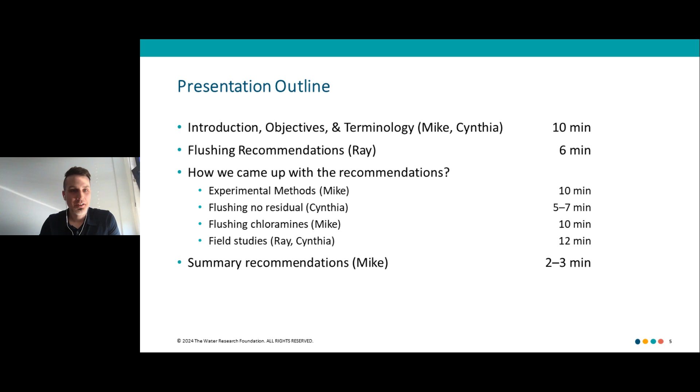I'll start with some introduction to the project and some background. Legionnaires' disease, of course, is something we're all interested in preventing. It's severe pneumonia, but Legionella can also cause other types of infection, like Pontiac fever, which is a milder influenza-like infection. There are also potentially other extrapulmonary infections that can be caused by Legionella.

It's important to also note that when we talk about Legionella, risk isn't equally apportioned. Legionella pneumophila is responsible for 90% or more of cases. It depends a little bit regionally, but it's the most commonly associated with illness, especially serogroup 1, more so than the other serogroups. But there are, and this is always updating, at least 64 or 65 other species, and about half of these have been clinically observed.

But these clinical cases account for a minority, typically less than 10%. That's probably underreported, but I think it's fair to say that Legionella pneumophila is the greatest cause of infection. But there is ongoing debate about the focus of preventative measures as well as monitoring, focusing specifically on the species Legionella pneumophila versus other Legionella.

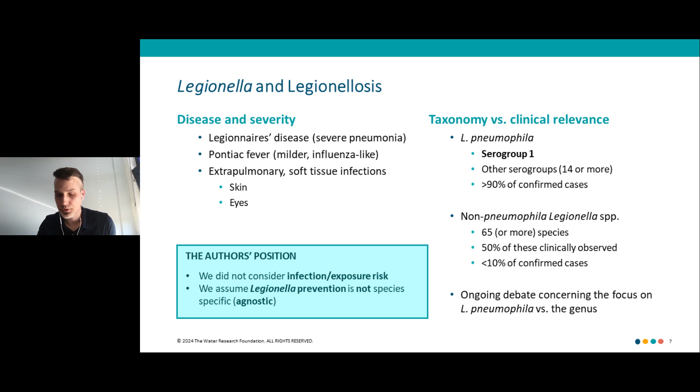Yes, so a little bit about, so water is not sterile. Drinking water is not sterile, and that includes both groundwater and surface water. And whenever you have water in contact with surfaces, you have biofilm develop. Bacteria tend to prefer being attached to things. And so Legionella are quite adept at integrating into both relatively young as well as mature biofilms. And once present, they become usually a small but persistent and ubiquitous fraction of the community.

And as biofilms grow, several things start to happen in terms of the ecology of the system. You can have shedding of the biofilm, which can spread new biofilm or colonization to downstream surfaces. But you can also start to attract protozoa. And so, for example, if you think of protozoa as cattle and biofilms as green pastures, protozoa come to feed. And this is usually deadly for bacteria in the biofilm, but Legionella have adapted to actually infect the protozoa and the host.

And so if Legionella infect the host, they can use the host for replication, and eventually they may reproduce and be released outward, where they can, again, infect other protozoa. They can infect or colonize biofilm. But if there's the risk of exposure, and you have a person inhaling water that's contaminated with Legionella, there is a risk of infection. The main cause of infection in terms of Legionnaires' disease is that Legionella infects the macrophage cell.

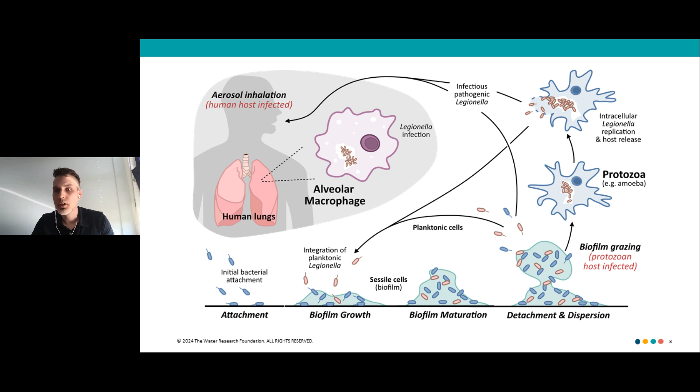So macrophage cells or white blood cells in the lungs are very similar, unfortunately, to protozoa and amoebas. And so Legionella pneumophila in particular is very adept at infecting this. But it's important to note that all Legionella more or less have some iteration of this. They're all parasitic in nature. And so if we talk about the factors benefiting Legionella survival and growth, general bacterial growth is a risk factor, and especially protozoa. But more broadly, the presence of carbon and nutrients that are available to support bacterial growth is also a risk factor. But we can also talk about temperature.

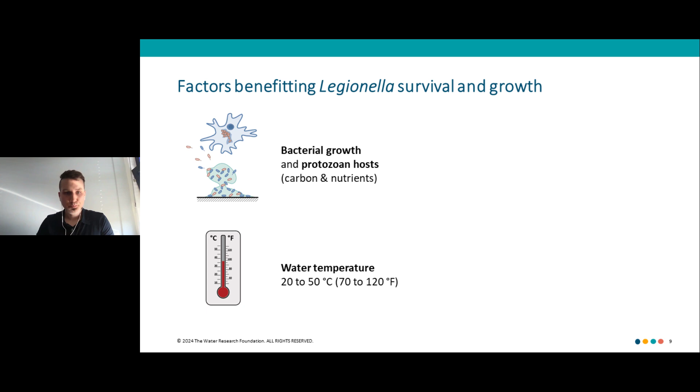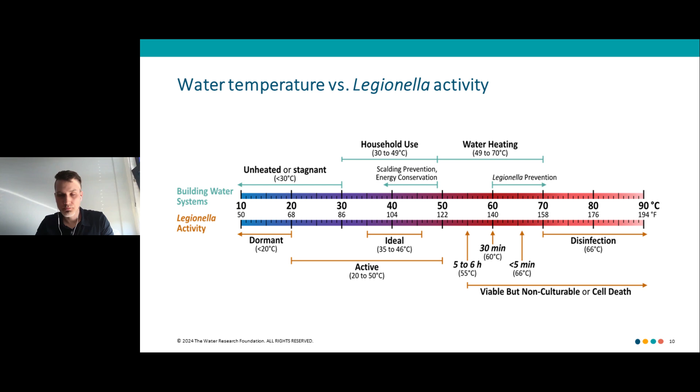But it's also worth noting that cold water, despite the name, we're calling it cold water, it's not necessarily cold. There can be thermal contamination from the hot water lines, and cold water can also be relatively warm seasonally, for example, depending on the source. So going back to the factors benefiting Legionella survival and growth, another one that we can think about is also whether there's a disinfectant residual present, and especially if there isn't, or if it's lost, that is also a risk factor. Legionella are generally vulnerable to various disinfectants, chlorine, chloramine, and others. So the lack of them benefits them.

These three other factors, growth rates, temperature cooling or heating up, but also loss of disinfectant residual, are all more or less time-based. So we might generalize that time is important, and especially residence time or water age is important.

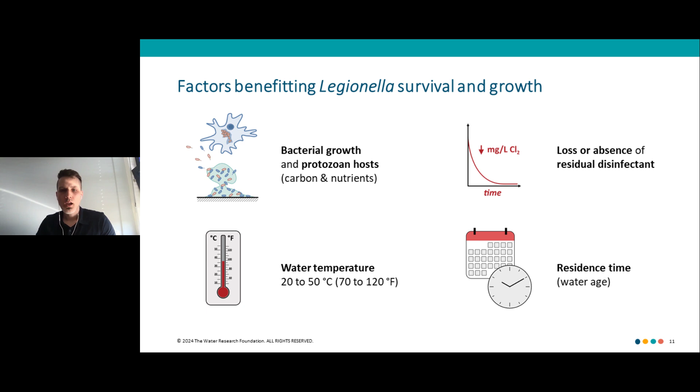And so if we think about the role of flushing, it can be simply to just manage or reset the water age, but this has other consequences, beneficial consequences. For example, we can regulate the water temperature, keep the cold water cold, keep the hot water hot. We can also expel accumulated biomass and replenish residual disinfectant.

So in this project, Water Research Foundation Project 5033, we had several objectives: assessing flushing for its potential as a corrective action for preventing and reducing Legionella levels in service lines of premise water systems, using a combination of laboratory experiments as well as real-world case studies to generate novel hypothesis-driven data. We then wanted to use those data to provide evidence-based recommendations to a broad audience of potential stakeholders regarding the efficacy of flushing for Legionella prevention.

So I'll hand it over to Ray. Hi, everybody. So what I'd like to do next is provide you with our recommendations at the outset. Then we will provide you with all the basis for these recommendations, including our experimental design, our field testing, and our results. And then Mike will come back and remind you of our recommendations at the end. So we'll tell you what we're going to tell you, we'll tell you, and then we'll tell you what we told you.

All right, so Mike pointed out a lot of these things already, so I'll just be brief. In terms of defining the problem and corrective action, we wouldn't be here if we didn't all believe or know that Legionella, and especially L. pneumophila, can cause severe illness. Another important point to mention is that these are not organisms that are associated with fecal contamination, unlike conventional pathogens that we normally worry about in water. These are naturally present in water and soil. And so because they're present in probably all or nearly all water supplies, including even groundwater, they can result in exposure risk in buildings if they multiply.

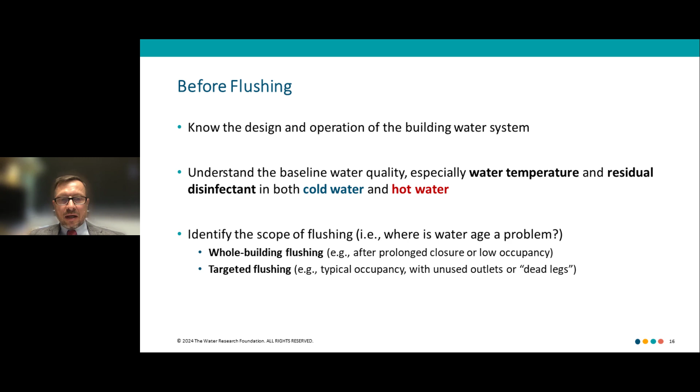And then it's important to identify the scope of flushing. So where is water age or extended water age a problem? Is this a whole building issue, say perhaps during the COVID pandemic when some buildings like offices and campus buildings here at the universities were shut down entirely? Or is it a targeted flushing? Maybe it's a specific unused outlet or dead leg in an otherwise occupied and heavily used building.

And our general flushing recommendations are as follows. First is to prime, what we call prime the cold and hot water systems with fresh municipal water coming from the mains, which typically would be the water of highest quality in the system. And so you would start near the inlet and flush out the service lines supplying the building, and then flush between the inlet and the hot water system if possible, and then move progressively further into the building. And as I already mentioned, it's important to note the baseline temperature and or disinfectant concentration entering the building so that you know when you've got that quote unquote fresh water exiting your tap.

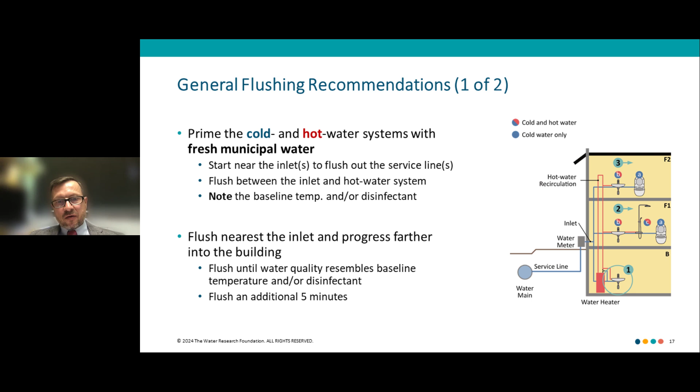And then, as I mentioned, flushing near the inlet and progress further into the building. It's important to flush until the water quality resembles the baseline temperature. By baseline, we mean water entering the building, say from the mains, and the disinfectant levels in that supply, or the water exiting the hot water heater, if you're flushing hot water lines. And then we recommend flushing an additional 5 minutes after you get that water quality to represent the inlet water quality.

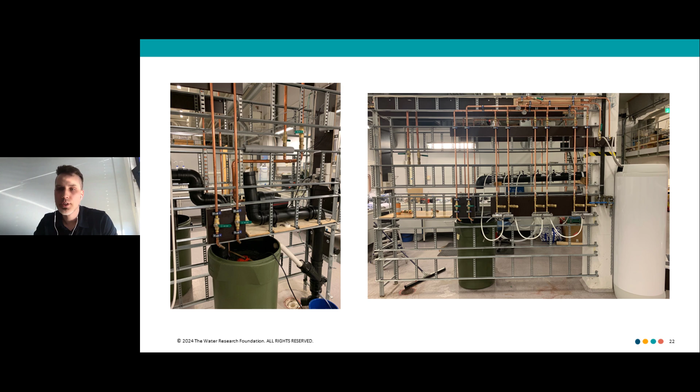On the right, it's a little bit difficult to see, but you have 3 showers, a water tank, and behind it you can kind of see the other rig, which is in parallel. So they're literally mirror images of one another. On the left-hand side, there's a garbage can that we basically used as our mix tank. So we could feed chloramine into that, mix it, and then deliver it via pump into the system.

So we operated this pilot for approximately a year, just a little over a year. And during that period, we operated 4 experimental phases. And so what these represent are different combinations of the variables. So we had the copper pipe, the PEX pipe. We had the first 2 phases without disinfectant, phases 3 and 4 with chloramine, and then switching from 60 to 49 and back to 60 again, with some time in between these phases to allow the system to adapt to the new conditions. Within these, we also had flushing events. So each phase had 3 flushing events. And I'll talk a little bit more about what a flushing event is in a few slides.

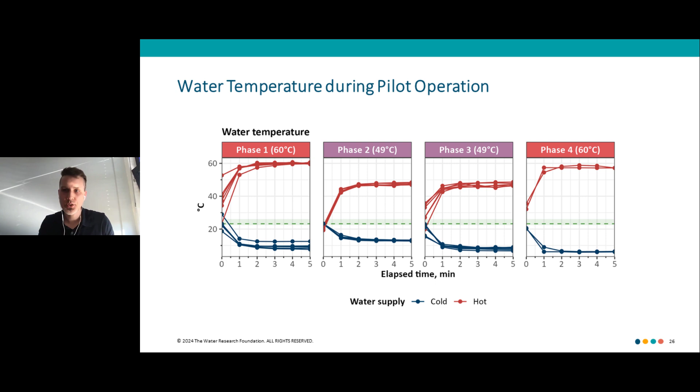But going back to the variables, I just wanted to quickly touch base again on what these mean. So starting from the bottom, temperature set point. This is more or less what a thermostat mixing valve looks like. So there's fairly precise control of the water in from both cold and hot, and then you can set it to deliver a specific temperature out. And so during flushing, we measured hot water quite precisely. I should mention that the thermostat mixing valve we used was not the factory installed one. We had to install a more precise one to get the temperature as precise as we wanted it.

So then moving on to the pipe material, the pipe materials where we sampled from were 5/8 inch. And you can see that the internal diameter was a little bit different owing to the slightly thicker pipe wall of the PEX.

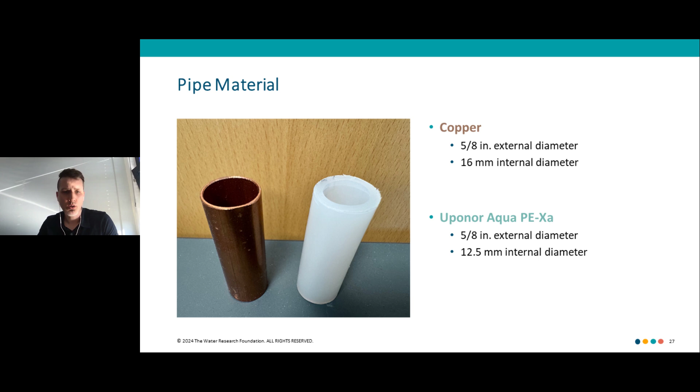As for the water entering the system, if you look at the bottom, the water supply is primarily lake water, so it's surface water coming from a depth of about 50 meters. And the water's quite soft. It's basically rainwater that collects in the mountains of Norway. And so they have to harden it. So they pass it through marble to add minerals and increase the hardness. And then it's hit with about 0.1 milligrams per liter of free chlorine and then UV. And it's distributed with negligible free chlorine.

And so the temperature year round in the distribution network is typically about 10 Celsius, pH of 8, hardness after hardening is 54, so it's quite soft water. The total organic carbon, or TOC, was about 2.7 milligrams per liter, and the assimilable organic carbon was about 100 micrograms per liter, which is more than enough to support bacterial growth under favorable conditions.

And like I said, in the distribution network, it's usually negligible concentrations of free chlorine. So we were interested in this context of no residual. That's very relevant for Norway as well as other European countries and maybe other countries around the world. But it's also relevant for countries like the US where you have groundwater systems that don't receive any disinfectant. But also even in systems where there is a disinfectant, it's quite possible, if not likely, that there are points in the system where you lose your disinfectant before it ever comes to a building. So no residual was kind of one extreme that we were interested in.

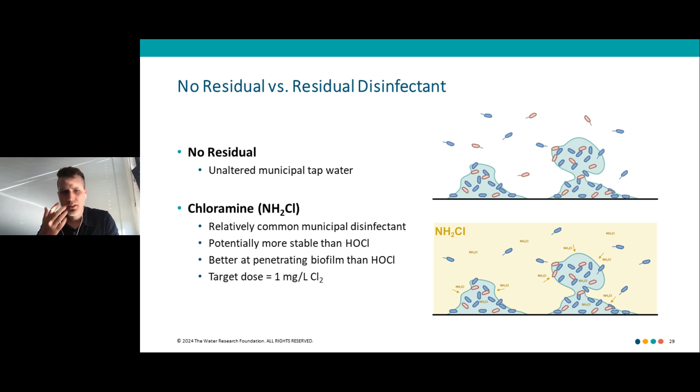And there's a growing body of evidence in the scientific literature that it is better at penetrating biofilm than free chlorine. Free chlorine is very reactive, and so it tends to react at the surface of the biofilm, but it isn't able to get down deep into the biofilm. And the target dose that we chose was 1 milligram per liter.

As for flushing, of course, it can reset the water age, but we were also interested in other benefits of flushing. Is the shear stress induced if you try to maximize the flow, does that actually harm the biofilm and remove biofilm from the pipes? And can that synergize with other strategies like thermal or chemical strategies? From a practical standpoint, we're also interested in, should operators put in the extra effort to maximize flow rate?

Now, they can't necessarily just magically improve the flow rates. They're somewhat limited by the pressure into the building. But you can, for example, remove aerators or other flow obstructing devices to try to maximize. And as we did, you can flush fully on the cold or fully on the hot, so you're not getting a combination of the two, which would have less flow. Yeah, so that's my little animation of shearing off the biofilm.

So operating the shower outlets, we had flushing, which I mentioned is maximized flow. We removed the shower hose when we did it. It was for 5 minutes, full cold or full hot. Turbulent flow, I won't go through all the flow rates, but they're there for you.

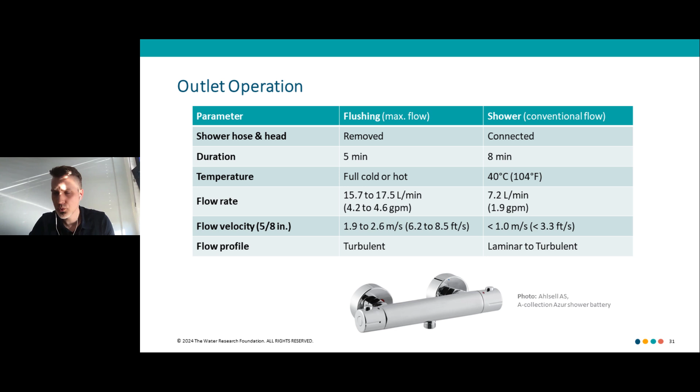And then for shower, we want to represent a conventional usage. So we actually used a Water Research Foundation report for the typical time and flow rate of a shower: 8 minutes, 7.2 liters per minute, or almost 2 gallons per minute, and 40 degrees Celsius, so a blend of hot and cold.

And so going back to the operation, I mentioned these flushing events. And so what this looked like, they were typically 2 weeks or 14 days in length. And so what would happen is we'd start with stagnant water that had been sitting and had accumulated a long water age. And then we would sample the water. In one of the lines, we'd flush it. Second one, we'd operate a shower. And then the third one, we'd do nothing. And then we would sample the water again. And then we'd sample the biofilm from the pipes.

And then we'd operate the flushed and shower line with daily showers for a little less than a week. And then afterwards, we just let the water sit. The final line was more of a control, so we could have what the biofilm looked like pre-flush and pre-shower. And which outlet did what was shuffled in between lines. So we tried to prevent a bias or carryover effect of the operation of the outlets between phases.

So the water samples, we collected either 100 or up to a liter of water. The water was filtered to collect the biomass. Some of it, the unfiltered water, was also used for additional analyses, which I'll come back to.

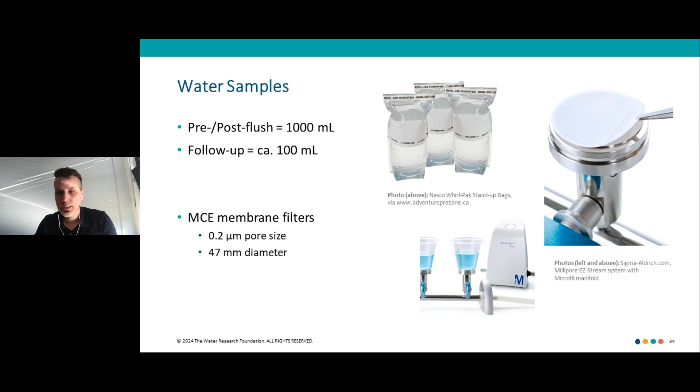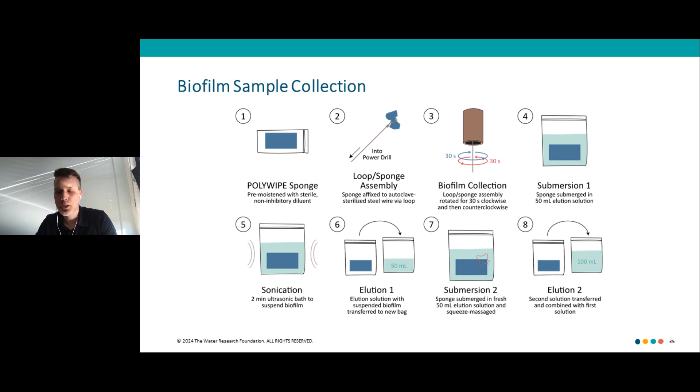We also collected biofilm samples, and our PhD student, Truka, who I should mention did most of this work, came up with a method to use a sponge with a wire wrapped around it, then plug it into a power drill, and then stick the sponge into the pipe, run it clockwise for 30 seconds one way, run it counterclockwise for 30 seconds, and then we used a combination of sonication and elution with a liquid to resuspend the cells, and then we extract the DNA from those.

And so our sample analysis, we used multiple methods, different types of methods. Quantitative PCR, we looked at total bacteria using 16S rRNA genes. We also looked at the total number of Legionella species, so the genus level. We also looked at Legionella pneumophila specifically, and Vermamoeba vermiformis, which is a common amoeba host of Legionella. We also used flow cytometry to look at total cell count and intact cell count, as well as cultivation methods.

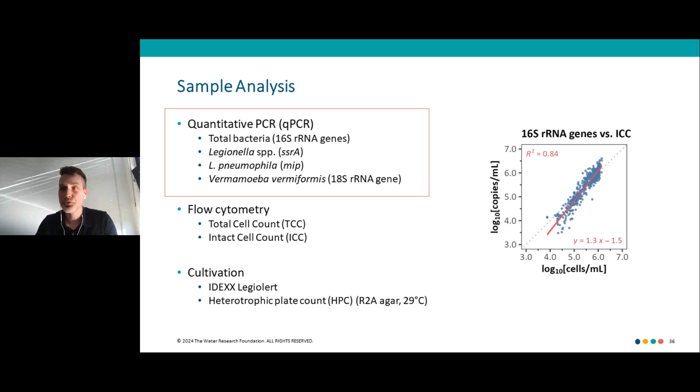We used IDEXX Legiolert. We never detected Legionella pneumophila, and so we ended up stopping using the Legiolert system. We also used heterotrophic plate counts to measure the general biomass, and we did this for 2 of the phases before stopping. We generally found that heterotrophic plate count underestimated biomass compared to the 2 culture-independent methods, flow cytometry and PCR. And as you can see on the right, the PCR and flow cytometry gave really consistent results. And so in this presentation, we'll just be presenting the PCR, but the full report includes some of the other results. So then I will pass it over to Cynthia.

Thank you, Mike. So I will start presenting the results we gathered during this project, and we are going to start with the flushing without a residual disinfectant. In addition to the report, WRF 5033, the results of the flushing experiment without chlorine residual have been published in Frontiers in Water.

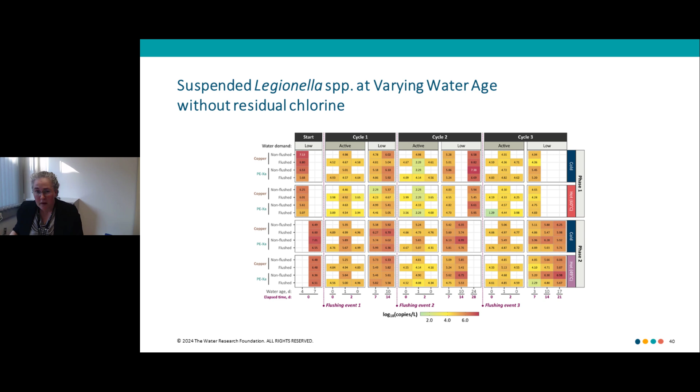If we focus on the short-term benefit of flushing on Legionella, this graph here shows that Legionella concentration decreases after a flushing event, if we compare pre-flush to post-flush. And in this graph, we can see the effect of pipe material, where the Legionella concentrations in copper and PEX pipe were similar. And we can also start to observe the trend where after a flush, the Legionella concentration starts to increase in both cold and hot water.

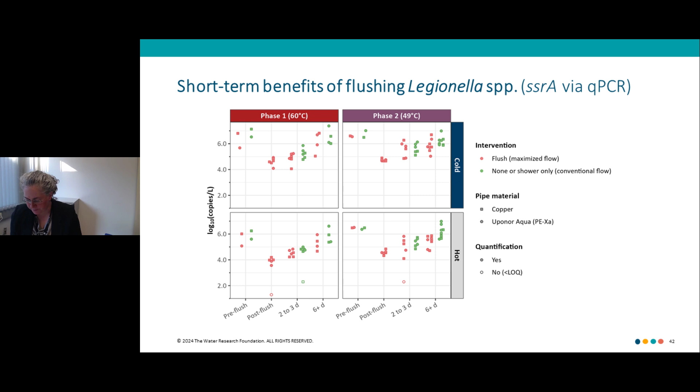However, for Legionella, the picture is quite different. Legionella species require more time than the total bacterial community to reach the stationary phase. In fact, during this study, we never saw a plateau in Legionella concentration to indicate a stationary phase. The growth model that we used estimates a carrying capacity for Legionella species between 5.5 to 7.4 log copies per liter.

So the key findings for this section are that immediate reductions of total bacteria and Legionella species in the water from the flushing or typical shower were similar, and they range between 90 and 99%. The higher flow rate during the flushing may accelerate the turnover of the water, which reduces the time required to flush, but does not influence the volume of water being flushed. The flushing is effective to reset bacterial levels, with significant reduction observed within approximately 3 days after flushing.

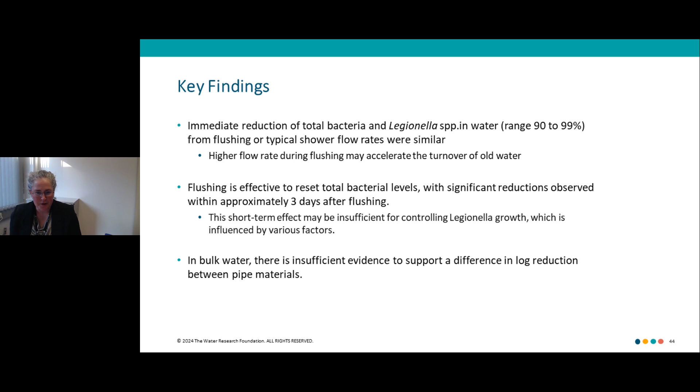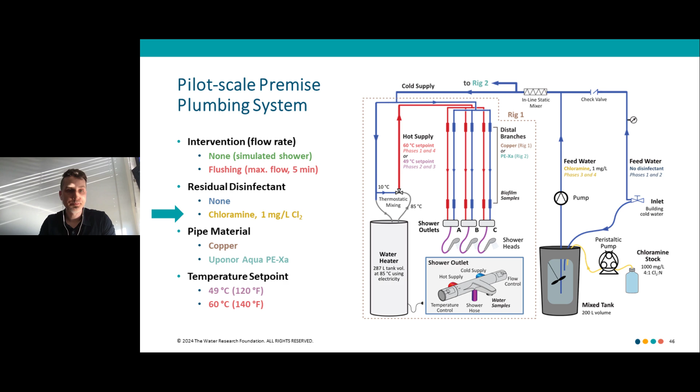Yes, thanks, Cynthia. So Cynthia gave a good overview of the results in terms of no residual, which is kind of the default state for Norway. But as mentioned earlier, we also looked at the case of residual chloramine. So to get into that a little bit more, we can talk about how we chloraminated the system. We made a stock chloramine using the EPA method of about 1,000 parts per million. We produced that using a 4:1 by mass ratio of free chlorine and ammonia. And then this was dosed into the mixed tank, where it was delivered at a final dose of about 0.9 milligrams per liter. Our target was 1 milligram per liter.

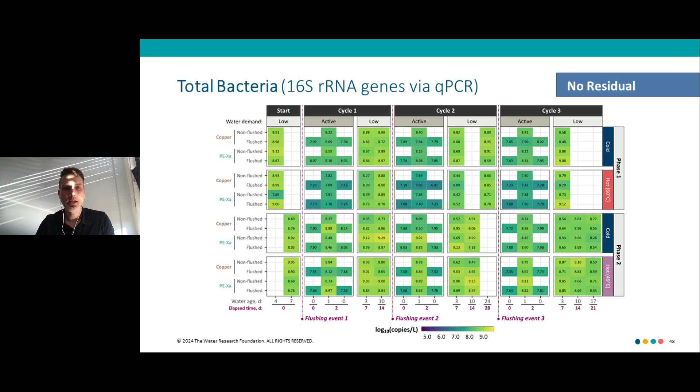So going back to these heat maps, I won't spend too much time with these, but what I find very appealing about looking at these is the visual contrast. So this was already presented to you by Cynthia. So this is without a residual. And if we look at it with a residual, it doesn't look actually that different, interestingly enough. So I'll just go back again, forward, back, forward. And so one of the interesting things actually is that during a higher water age, the concentration was a little bit higher. And it's quite possible that we were actually stimulating bacterial growth in the water phase when we added chloramine, because the chloramine decays into ammonia, a source of nitrogen.

So we could be increasing the nitrogen in the water. These are relatively low nitrogen waters. We might also be producing more accessible organic carbon by the chloramine reacting with natural organic matter. But we don't really have enough information, and it isn't a huge increase, it's just like a half a

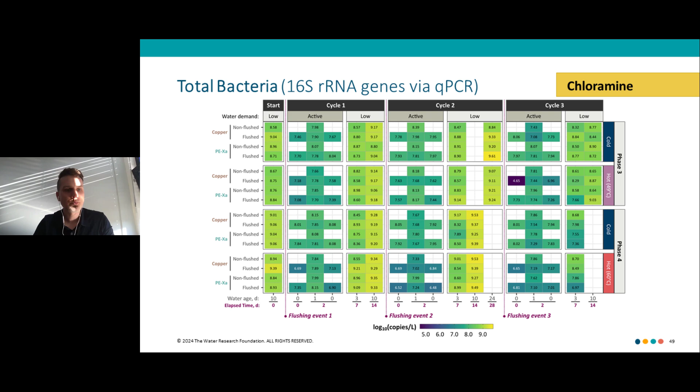log increase or less. So if we look at what this means in terms of no residual, as Cynthia mentioned, you saw a drop in total bacteria immediately after flushing, and it was back up to its basically stationary phase concentrations, maximum concentration within 2 to 3 days, and it stayed pretty consistent beyond 2 to 3 days. And interestingly enough, the same thing was observed with chloramine, which is a little bit unexpected, how fast they were able to respond to the addition of chloramine.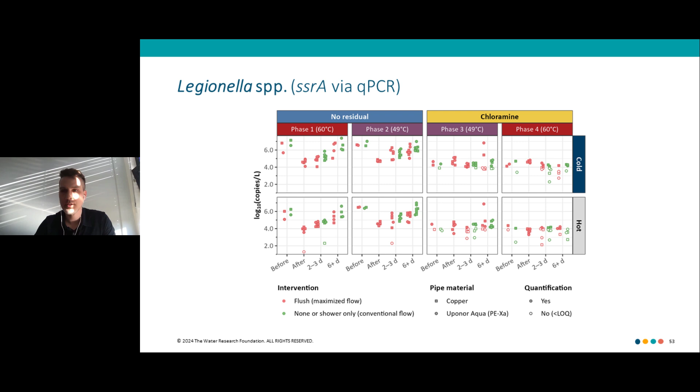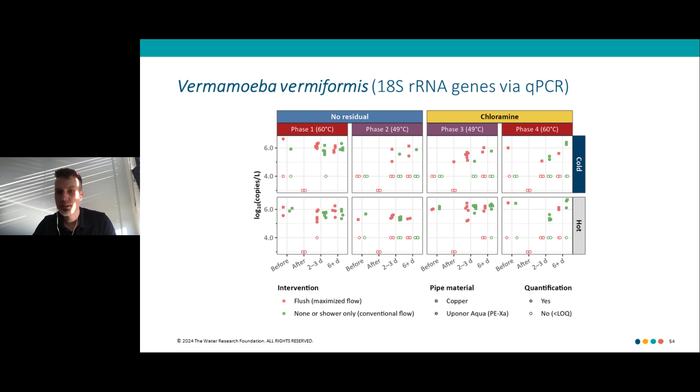Looking at the amoebas, they were kind of hit or miss, so it's difficult to draw too many conclusions. But the main one is that they typically were not in fresh water coming into the system, but they were often detected once you had water age. So again, looking at growth versus water age. So in these plots, again, log scale on the y-axis, water age on the bottom. The top lines, the solid lines with white dots, is total bacteria, whereas the dashed lines with non-white dots or diamonds are Legionella. And so we see pretty much the same behavior between copper and PEX.

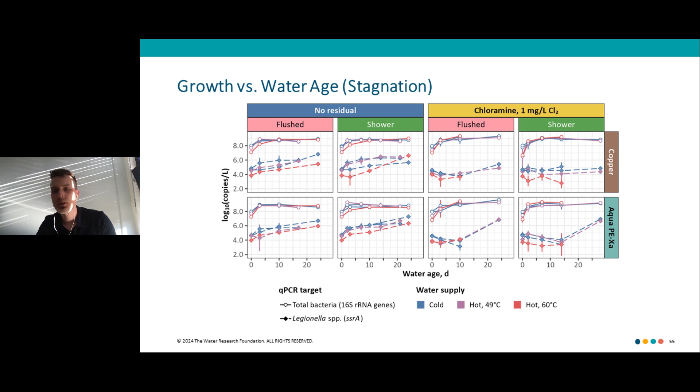And the biggest similarity is that total bacteria grows in about the same amount of time, regardless of whether the chloramine was added or not. But we see a stronger result with the addition of chloramine versus Legionella in terms of it stays pretty low. Interestingly enough, we saw in PEX that it tended to increase, where we didn't see that same level of increase in copper, but we didn't have enough data points at that really extended 20+ day mark to draw any statistical significance. But certainly in the short term, there wasn't any noticeable effect between copper and PEX.

So the key findings, that there's a limited effect of chloramine versus total bacteria. It may even be stimulated, but time is also a variable in terms of we ran the experiments over the course of a year. And so maybe there's other things happening, seasonal differences, for example. Concentration of Legionella was stable post-chloramination, so it seemed to damage or induce a lag phase. Vermamoeba were present at low levels with higher water age, which is consistent with there being higher biomass at higher water age. And so that gives them something to respond to and eat.

But it also makes the beneficial mechanism of flushing a little bit different depending on the context. So when there's no residual, bacterial growth, including Legionella growth, is not under control. And so flushing is important to expel this accumulated biomass. Whereas with chloramine, Legionella growth was suppressed. And so flushing was necessary to keep that suppression active, so resetting the disinfectant levels. And it didn't suppress the total bacteria. So in that case, it also helps expel bacteria.

And another interesting trend or theme throughout this is that Legionella presence and growth was not limited to the hot water. So a lot of focus, especially in Norway, is focused on the hot water. But it's the cold water too. And so they come in with the cold water and there's activity in the cold water.

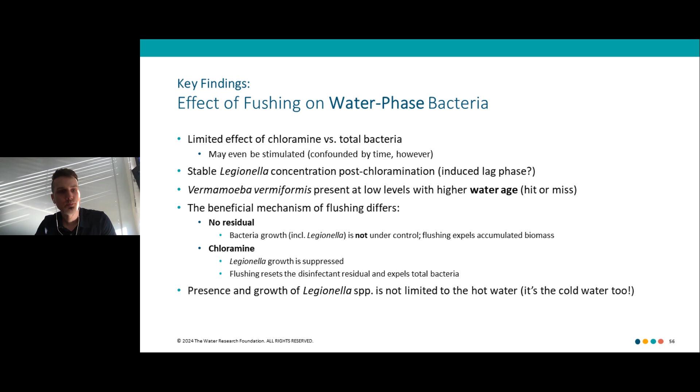Looking at the biofilm, we didn't do too much in terms of interpretation. It's a little bit difficult, especially with Legionella, because they're often below the quantification limit. There are some key things to note. So on the left-hand side is total bacteria levels. We generally saw lower biofilm levels with chloramine than with no residual, but there are biofilm in both cases. And there was biofilm in both hot and cold water, which was also interesting. So just because it's super hot, 60 plus degrees, does not mean that it is free of biofilm.

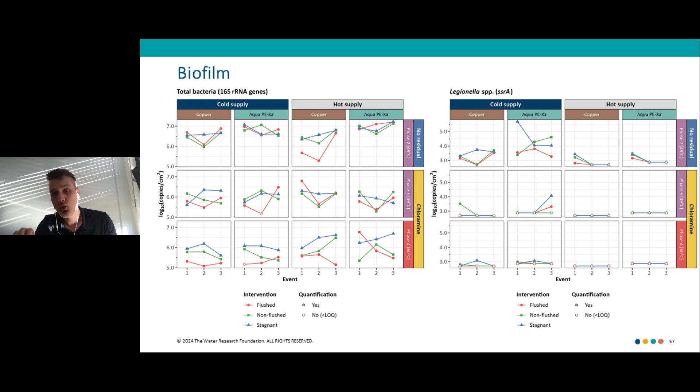And in terms of Legionella, though, we saw actually more biofilm in the cold water than in the hot water. We had to throw out the data from phase 1 because we changed the biofilm method. But phases 2, 3, and 4 were the same method. So, also of note is that chloramine really seemed to help suppress Legionella levels in the biofilm.

So the key findings here were that there was no clear or at least consistent effect of pipe material with regard to biofilm biomass. There were similar total bacteria between hot water and cold water, but less Legionella in hot water versus cold water, which is somewhat at odds with what we usually think of as hot water being the problem. And also, chloramine helps reduce biofilm Legionella versus when there isn't any chloramine.

But it's important to note that even if you removed all the biofilm, if Legionella is still coming in with the water, we clearly saw growth in the water phase. So just removing the biofilm doesn't stop the problem of Legionella because it will continue to come in. So then I will turn it over to Ray to talk about our field studies.

Thanks, Mike. So I'd like to just spend a few minutes talking about a field study that we did in Minnesota, in the United States. And so our sampling sites included 5 University of Minnesota buildings. 4 were on the Minneapolis campus of the university. We labeled these A, B, C, and D. And it's important to note that this is a surface water supply. So it's from Minneapolis Water Treatment Distribution Services. It's from the Mississippi River, softened, filtered, and then finished with chloramines. Typical concentrations that we see in the distribution system range from about 3 to upwards of 3.5 milligrams per liter of Cl2.

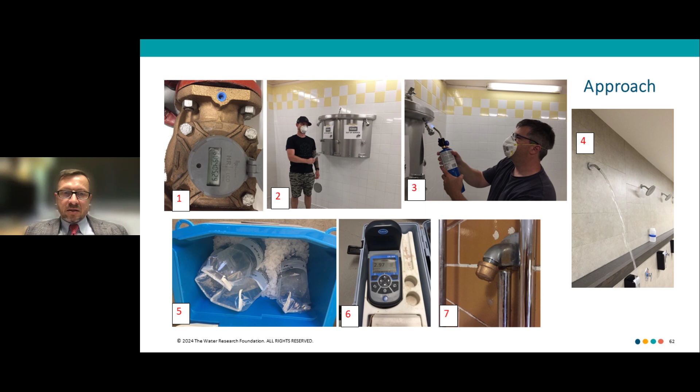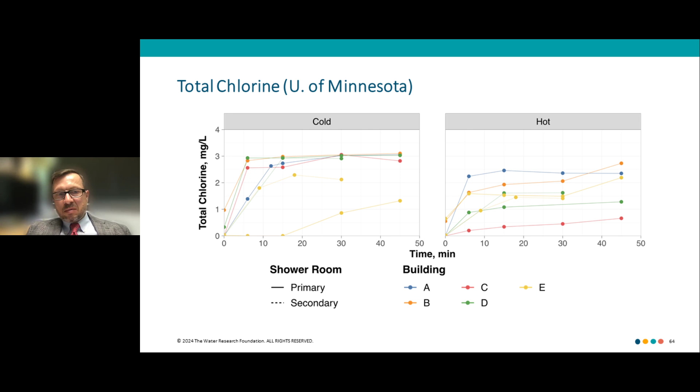In the hot water, we never obtained the inlet chlorine concentration of the cold water supply. So normally the chlorine concentrations in the hot water was maybe 10% to maybe 70 or 80% of the building inlet concentration in the cold water.

And as Mike already pointed out, when we turned the flushing off after about 45 minutes, and we came back and sampled, say 1 to 2 days later, or again 5, 6, 7 days later, what we found is that usually within a couple of days, the chlorine concentration was substantially suppressed, maybe half or less of what we started with, which was around 3 milligrams per liter in most cases. And then within 5 or 6 days, the chloramine concentration was basically non-detect. And if we did the same thing in a glass bottle, we saw very little decay. So obviously there's more things in the pipes to react with, including biofilm, including copper, what have you.

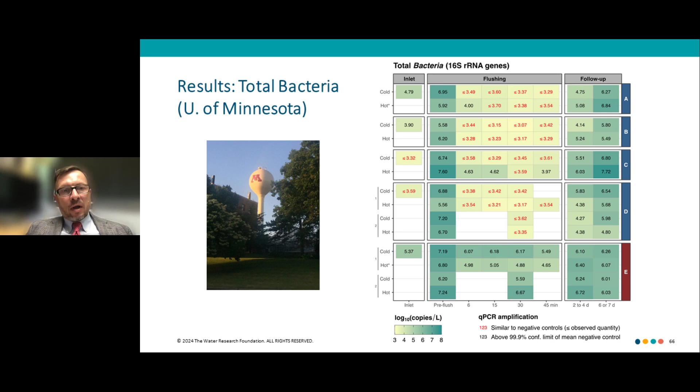Paul campus that was not being heavily used. The campus building wasn't being heavily used because of the shutdown. We never detected Legionella pneumophila via either Legiolert or PCR. So it's important to point that out.

And then if we look at Legionella species, we saw much the same thing in terms of total biomass, where the inlet concentrations were typically below or non-detect, especially the Minneapolis buildings. The pre-flush concentrations were the highest we observed. When we flush, the concentrations typically diminish to non-detect. And then during some follow-up sampling, we start to see some rebound, although we didn't quite rebound fully within a week. So we started to see some detections, but we didn't quite get back to where we started.

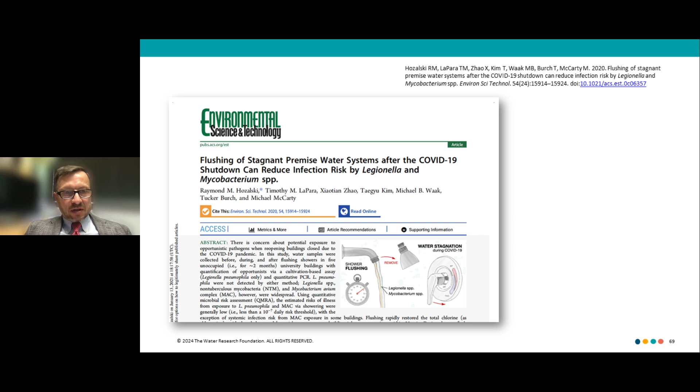The St. Paul building was a bit of an oddball again. We think that was because of elevated water ages from a water storage tower on that campus. These data are published in a paper in Environmental Science & Technology if you would like to read more about this study. So some take-home messages.

Chloramine appears to limit colonization of premise plumbing systems by L. pneumophila, decreasing the likelihood of problems from building closures and elevated stagnation on the order of weeks. Other concerning populations were observed, including Legionella species and MAC, but in all cases, we did not observe any concentrations that would be considered serious health risk. We did quantitative microbial risk assessment. I didn't get a chance to show you the groundwater data in the interest of time.

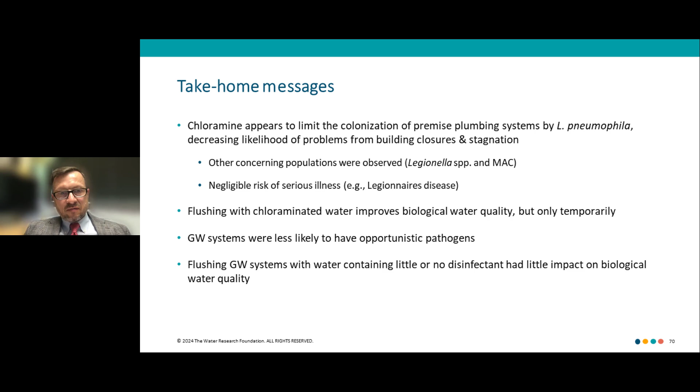It's also important to mention that flushing with chloraminated water does improve biological water quality substantially, but only temporarily, so it's important to keep that in mind. And then the groundwater systems were less likely to have opportunists, and flushing seemed to have little or no impact actually on biological water quality in the absence of disinfection. And then I'll move it on to Cynthia, who will talk about the field study in Norway, and we're almost done. Yeah, thank you, Ray.

So in collaboration with the municipality of Trondheim, we conducted a field study in a primary school, and it was selected because of its accessibility for sample collection and also its extended monitoring. The sampling protocol was implemented in April 2022, following a temporary closure of the school for approximately 11 days. The building received its drinking water from the same source as the pilot system described by Mike earlier on.

At the school, the thermostat of the hot water heater was set at 70 degrees, but the delivered water was at 50 degrees to avoid scalding in the facility. 3 shower outlets were selected on the main floor of the building. One outlet was randomly selected in the men and women locker room, employee locker room, and the third outlet was located in an unused washroom at the end of the hall.

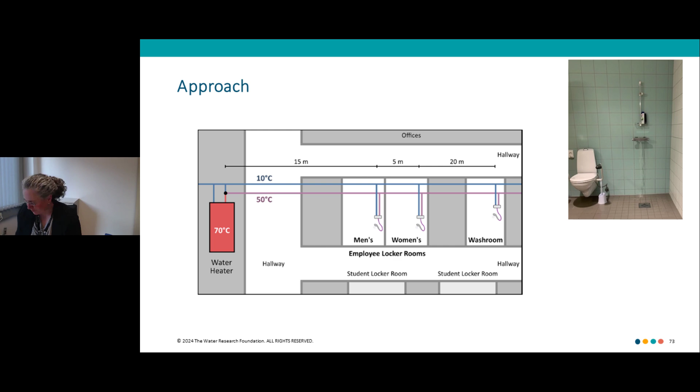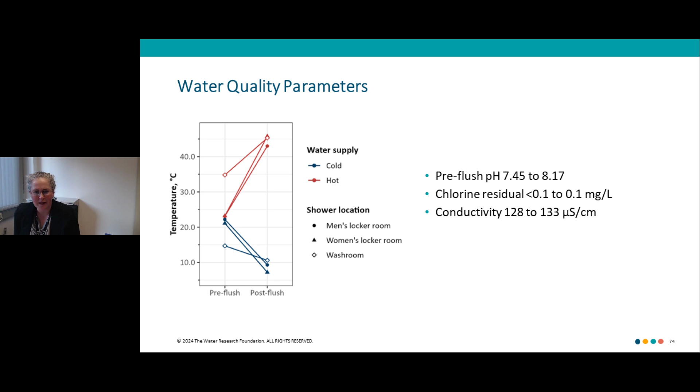And here we see the water quality parameters, where the hot water never quite reached the target temperature of 50 degrees Celsius, but rather 45 degrees. And the cold water after a post-flush was approximately 8 degrees Celsius. No chlorine residual was monitored in the water at any time, and the pH varied between 7.5 and 8.2.

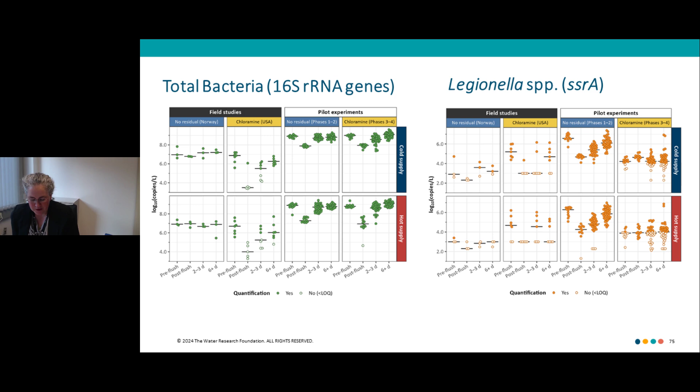During this study, the total bacteria were detected in stagnant pre-flush samples at concentrations between 5.4 and 7.4 log copies per liter in both hot and cold water. So the flushing of the cold and the hot water line did not reduce the total bacterial concentration. And also, the Legionella species were typically below the limit of quantification for this flushing event.

In addition to the total bacteria and Legionella, we looked at the cell concentration using online flow cytometry, and we measured total cell count and intact cell count continuously for an extended period of time. And those two plots suggest that the cell count increase is time dependent, and it's also linked to water usage during the day. We can see a spike in both total cell count and intact cell count at the time of usage in the morning, Monday morning, Tuesday morning, Wednesday morning, and so on.

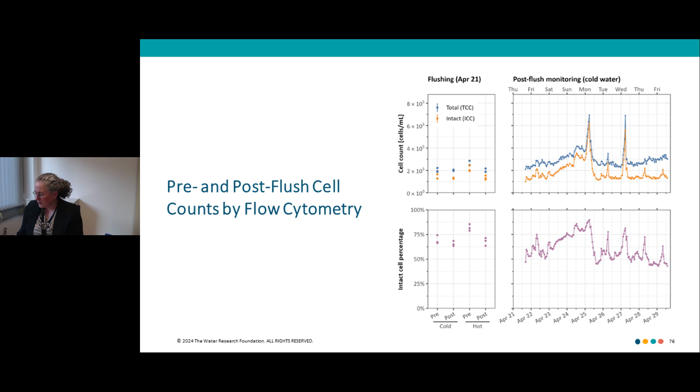So I will pass it over to Mike for the final flushing recommendations. Yeah, and Ray did a nice job at the start of the presentation summarizing these, so I'll just re-summarize them very briefly.

Flushing resets the water age, and what we saw is that the water age was the main driver. So it wasn't how fast the water was flowing or anything. The benefit was just from resetting it.

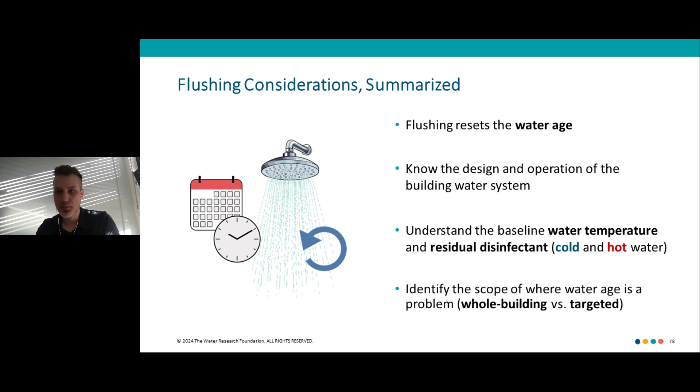It's good to understand your system as is and how you operate it. Understand the baseline water temperature and residual disinfectant, if there is a disinfectant residual. We identified these two parameters as the most practical and useful in terms of indicating when the water has, in fact, been turned over. And identify your scope. Whole building, or are you doing targeted? Where's the problem with water age?

So the general recommendations: prime your cold and hot water system with fresh municipal water. Start with the service line, move toward the hot water system, and then flush different lengths of pipe farther and farther out from the different outlets as you get farther from the inlet. Consider prioritizing faucets and toilets before showers, just to reduce the amount of potential aerosols and contaminated water being produced.

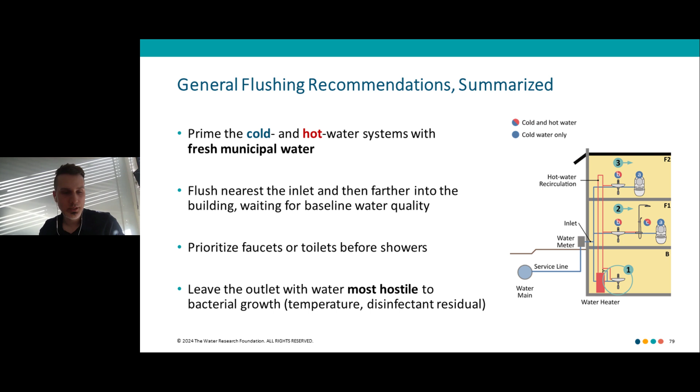And then leave the outlet with water most hostile to bacterial growth. Based on what we saw in terms of regrowth or new growth of cells, if the residual disinfectant is present, we found about a week was good. If no residual disinfectant was present, you have less time, so about 3 days. When should I flush? Before water users could be exposed and outside normal peak hours.